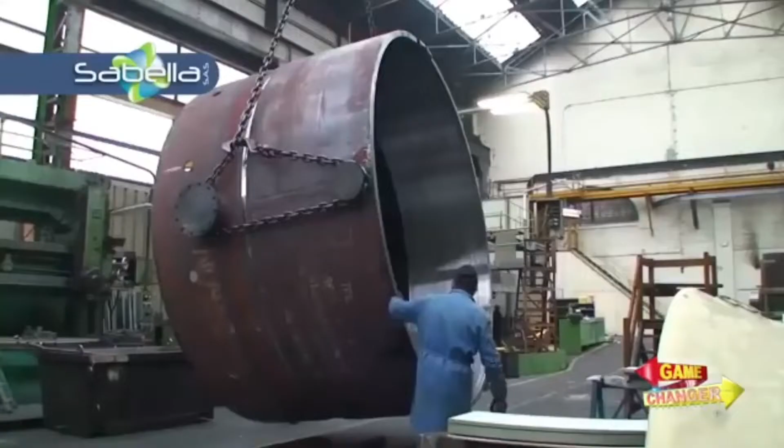We can harness energy from the oceans, and there are a lot of ways to do it - via wave, via ocean thermal energy, or what we have now, which is called tidal in-stream energy conversion, or TISEC. Thanks to the collaboration of two companies, the first ever tidal power plant in the country would soon reach our shores.

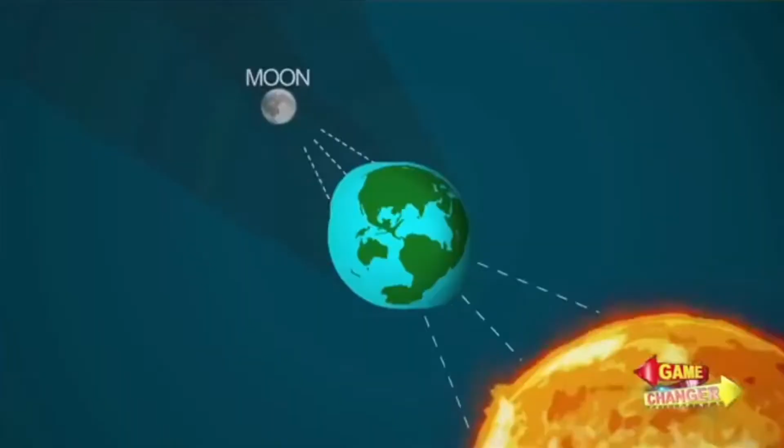So what makes tidal power reliable? One word: predictability. The movement of the sun and the moon do not deviate, so you can predict exactly how your tides will flow and how strong they will be flowing tomorrow to the next 18 years. And that's the huge advantage over any other renewable energy source.

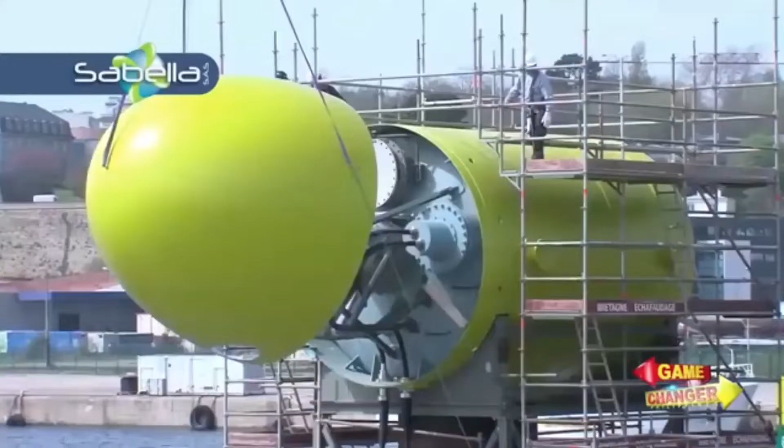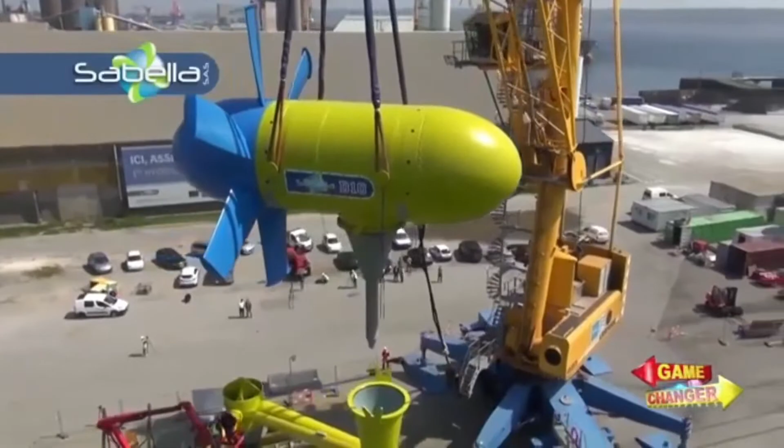In terms of technology, tidal energy traditionally lags behind solar power and wind energy generation. But the tide may now be turning in its favor. With recent developments in the field, sites with lower than optimum tide flow velocities can now be used to create electricity, significantly increasing potential sites.

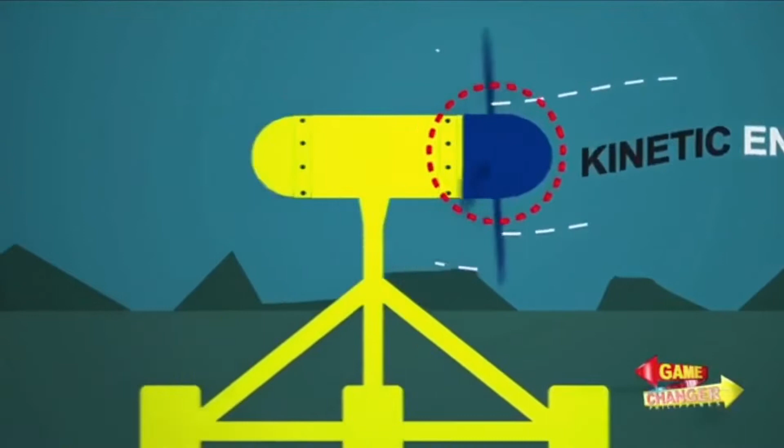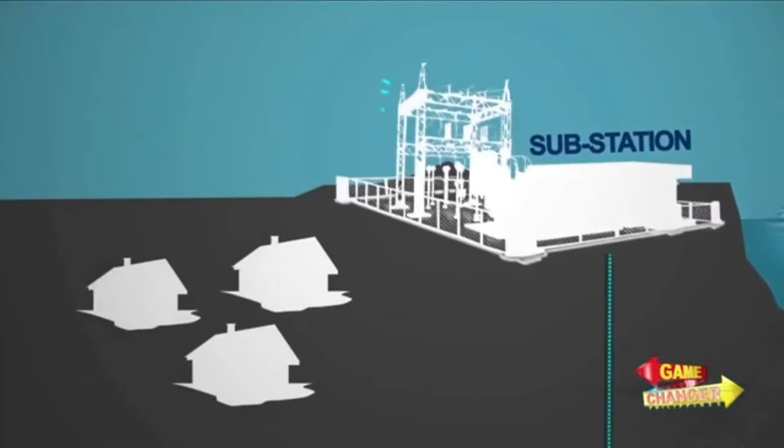The kinetic energy of tidal streams is transformed into mechanical energy by the turbines. A generator inside each turbine would then transform the mechanical energy into electrical energy. The electricity produced would course through a submarine cable to substations on land and eventually be distributed to consumers. In the proposed plant, each turbine is 15 meters long.

The beneficiaries would be communities in the island of Capul, northern Samar. Capul is short for Acapulco, commemorating its importance in the Manila-Acapulco galleon trade of the 1600s. Today, Capul relies solely on diesel generators to provide electricity to 60% of the island's power needs for only 8 hours a day.

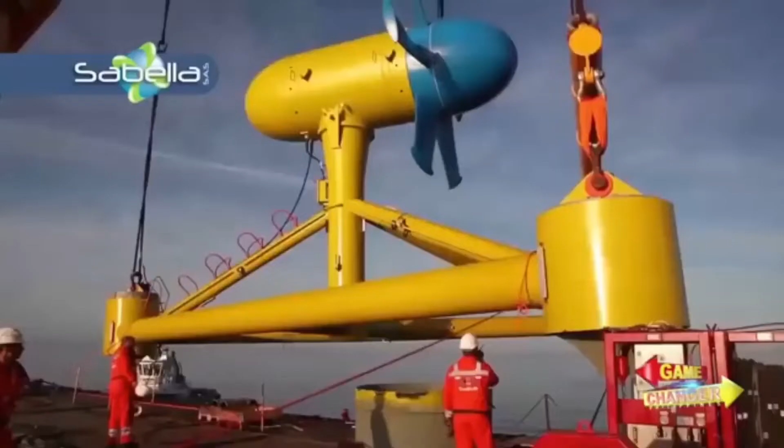So now we know what resource we have there, and we got Sabella on board. Sabella comes in with its extensive technical expertise, and we will be deciding what kind of turbine and where exactly we will be placing it in San Bernardino.

The San Bernardino Strait is the gap that separates the Bicol landmass and the island of Samar. And if there's one place in the eastern part of the country where the tidal flow is greatest, it would be here. Unfortunately, it is also where all manner of marine life enters our waters from the Pacific Ocean, including the biggest fish in the world, the whale shark or the butanding.

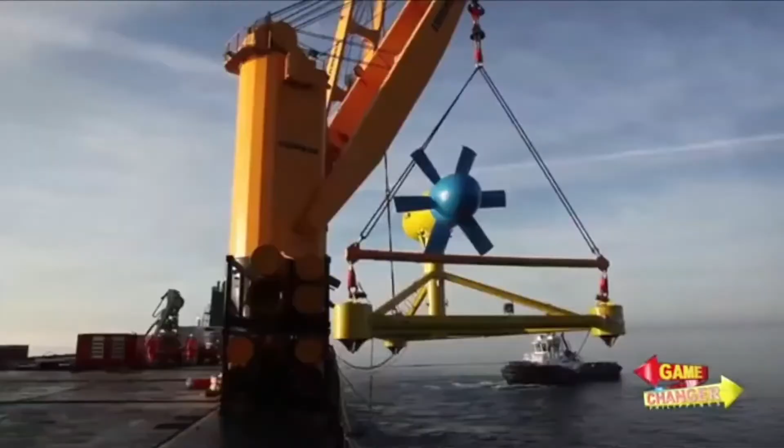The tidal power plant will be built with the latest high-technology center, which would accurately monitor relevant data from the turbines.

So, can you imagine if we can tap these resources? And considering the Philippines is an archipelago, surrounded by water, definitely the development and deployment of ocean energy technologies will be a game changer, not only today, but definitely in the future.

Power plant analysis of tidal energy. So let's talk about tidal energy.

What is tidal energy? Tidal energy is a form of power produced by the natural rise and fall of tides caused by the gravitational interaction between Earth, the Sun, and the Moon.

Tidal currents with sufficient energy for harvesting occur when water passes through a constriction, causing the water to move faster. Using specially engineered generators in suitable locations, tidal energy can be converted into useful forms of power, including electricity. Other forms of energy can also be generated from the ocean, including waves, persistent ocean currents, and the differences in temperature and salinity in seawater.

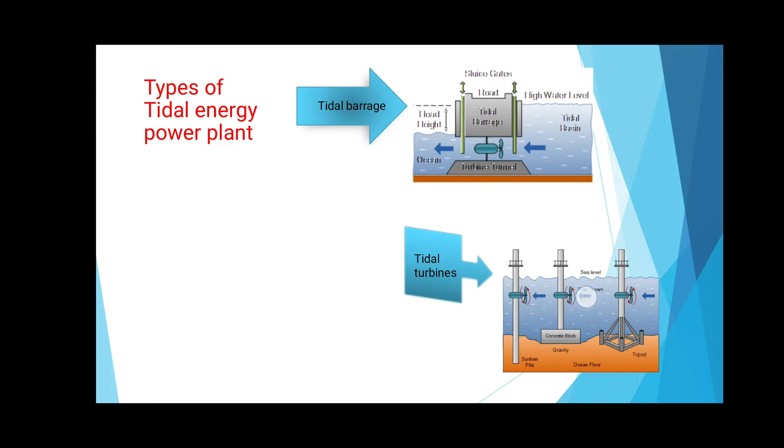The third one is tidal fences. A tidal fence is a type of tidal power system that has vertical axis turbines mounted in a fence or row placed on the seabed. Similar to tidal turbines, water passes through the turbines and generates electricity.

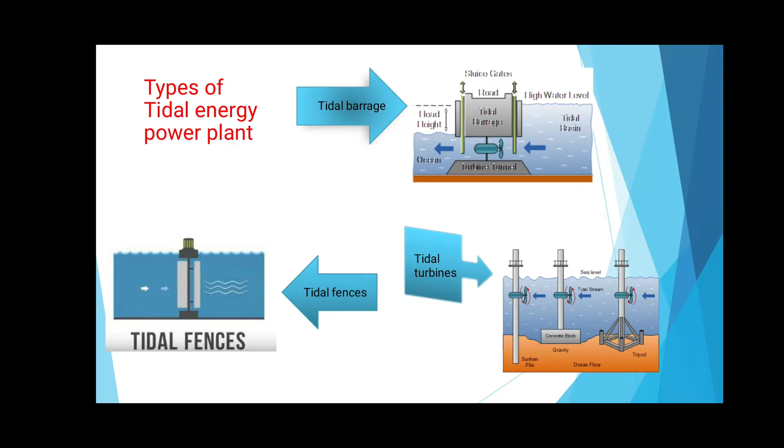Advantages and disadvantages of tidal energy power plants. Advantages: it is a renewable source of energy. Tidal energy is environmentally friendly and doesn't produce greenhouse gases. Because 71% of Earth's surface is covered by water, it is possible to generate this energy on a large scale. Efficiency of tidal power is far greater compared to coal, solar, or wind energy. Its efficiency is around 80%.

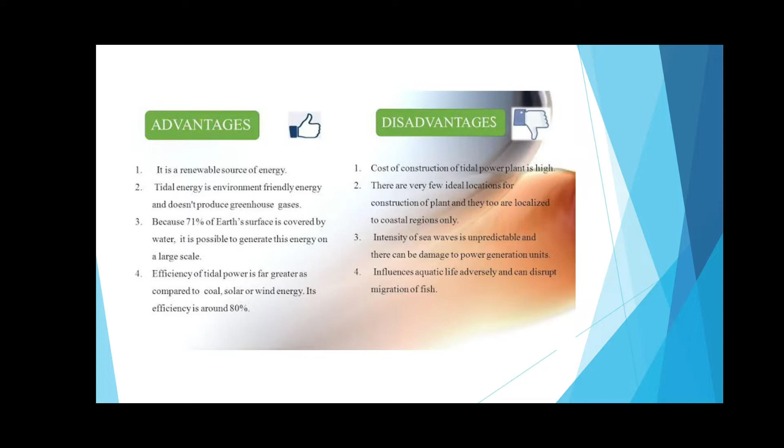Disadvantages: cost of construction of tidal power is high. There are very few ideal locations for construction of plants, and they too are localized to coastal regions only. Intensity of sea waves is unpredictable and they can cause damage to power generation units. They influence aquatic life adversely and can disrupt migration of fish.

The world's biggest tidal power plants are located at Sihwa Lake Tidal Power Station, South Korea; La Rance Tidal Power Plant in France; Swansea Bay Tidal Lagoon, United Kingdom; MeyGen Tidal Energy Project, Scotland; and lastly Annapolis Royal Generation Station in Canada. To know more about tidal energy, let us watch and learn in this video.

Tidal power is a form of hydropower that converts the energy from the natural rise and fall of the tides into electricity. Tides are caused by the combined effects of gravitational forces exerted by the moon, the sun, and the rotation of the earth.

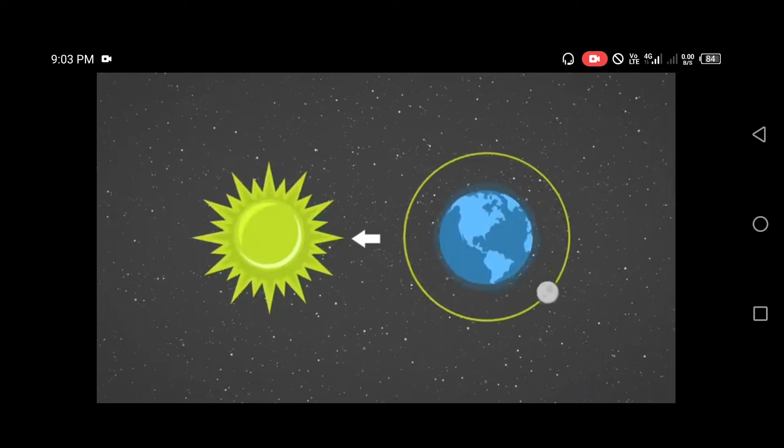Tidal plants can only be installed along coastlines. Coastlines often experience two high tides and two low tides on a daily basis. The difference in water levels must be at least 5 meters high to produce electricity. Tidal electricity can be created from several technologies, the main ones being tidal barrages, tidal fences, and tidal turbines.

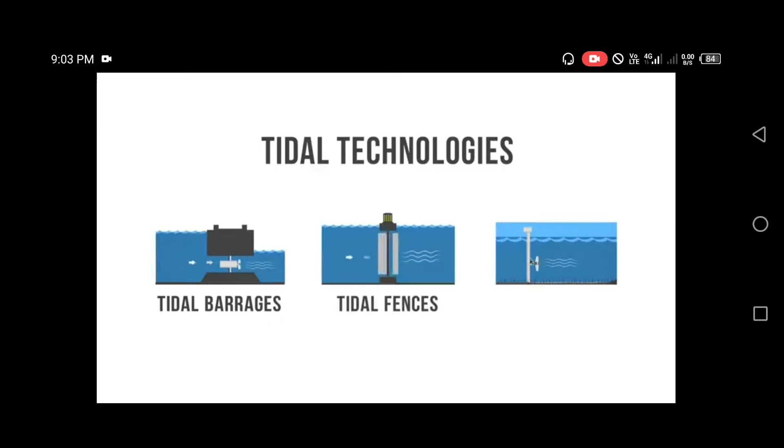Tidal barrages are the most efficient tidal energy sources. A tidal barrage is a dam that utilizes the potential energy generated by the change in height between high and low tides. This energy turns a turbine or compresses air, which in turn creates electricity.

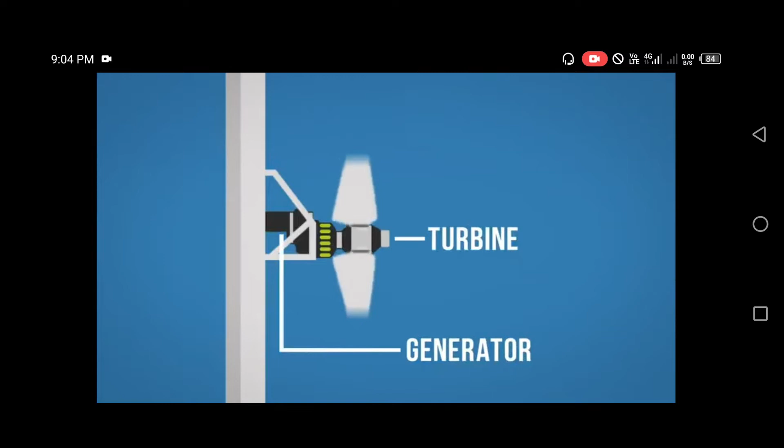Tidal fences are turbines that operate like giant turnstiles, whereas tidal turbines are similar to wind turbines, only underwater. In both cases, electricity is generated when the mechanical energy of tidal currents turns turbines connected to a generator, which produces electricity. Ocean currents generate relatively more energy than air currents because ocean water is 832 times denser than air and therefore applies greater force on the turbines.

Tidal power is easy to install and renewable, having no direct greenhouse gas emissions and a low environmental impact. Because the ocean's tidal patterns are well understood, tidal energy is a very predictable energy source, making it highly attractive for electrical grid management. This sets it apart from other renewables that can be more unpredictable.

However, adoption of tidal technologies has been slow, and so far the amount of power generated using tidal power plants is very small. This is due largely to the very specific site requirements necessary to produce tidal electricity. Additionally, tide cycles do not always match the daily consumption patterns of electricity and therefore do not provide sufficient capacity to satisfy demand. That's tidal power.

Tidal energy's global environmental impact. A tidal power scheme is a long-term source of electricity. A proposal for the Severn Barrage, if built, has been projected to save 18 million tons of coal per year of operation. This decreases the output of greenhouse gases into the atmosphere.

Fossil fuel resources are likely to decline during the 21st century, as predicted by Hubbert peak theory. Tidal power is one of the alternative sources of energy that will need to be developed to satisfy human demand for energy.

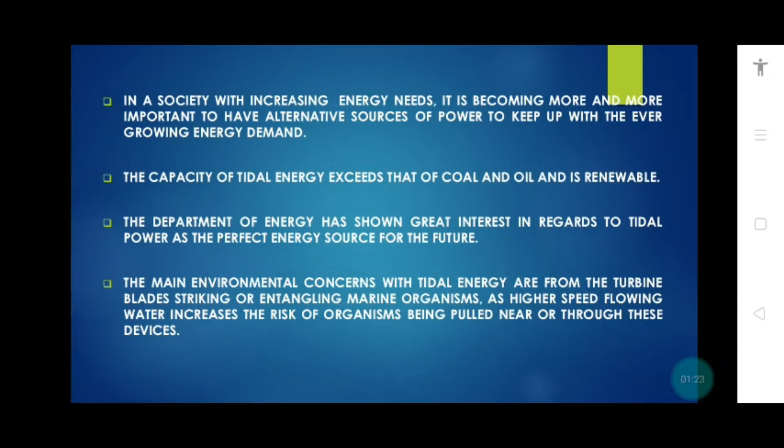The main environmental concerns with tidal energy are from the turbine blades striking or entangling marine organisms, as higher speed flowing water increases the risk of organisms being pulled near or through these devices.

Health and safety considerations: as far as tidal power is concerned, air chambers on the turbines will need to be built on the shore, which cannot only interfere with the habitat of local wildlife, but can be visually intrusive for local residents and visitors to the area.

The social and ethical considerations: in order for a power plant to be built, the potential installation site must meet very specific requirements. First, they need to be located on a coastline, which limits potential station sites to coastal states. The tidal power stations need to be built in places where the difference in height between high and low tide is significant enough to power turbines.

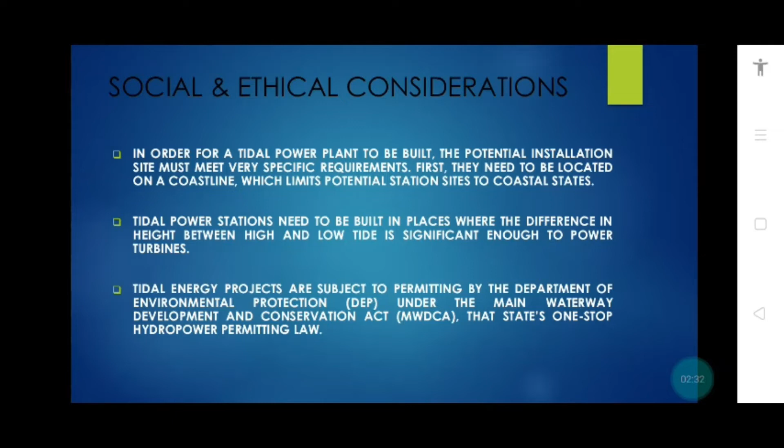Tidal energy projects are subject to permitting by the Department of Environmental Protection under the Maine Waterway Development and Conservation Act, that state's one-stop hydropower permitting law.

Hello, now we are going to solve some sample problems related to tidal wave energy using a tidal power plant.

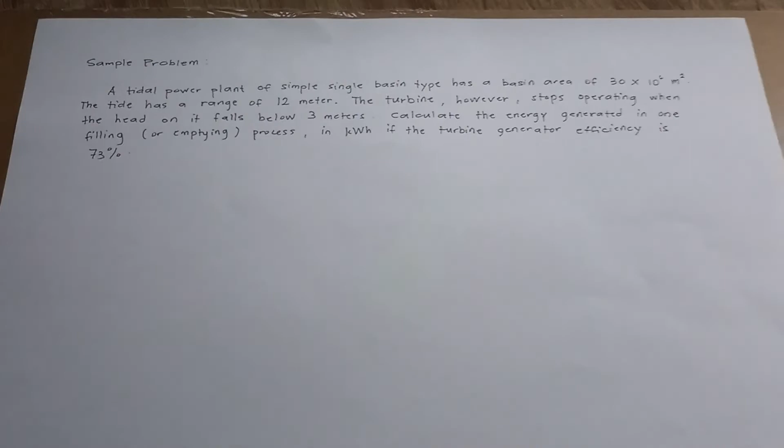Here's the problem. A tidal power plant of simple single basin type has a basin area of 30 million square meters. The tide has a range of 12 meters. The turbine, however, stops operating when the head on it falls below 3 meters. Calculate the energy generated in one filling or emptying process in kilowatt-hours if the turbine generator efficiency is 73%.

Okay, so to better understand the situation, I will provide a drawing.

Here's the drawing. The tidal power plant is a simple single basin type, so single basin, and it has a basin area of 30 million square meters. So the area here, taas and lapad, is equivalent to 5,000 football fields. That's how big it is. And then the tide has a range of 12 meters.

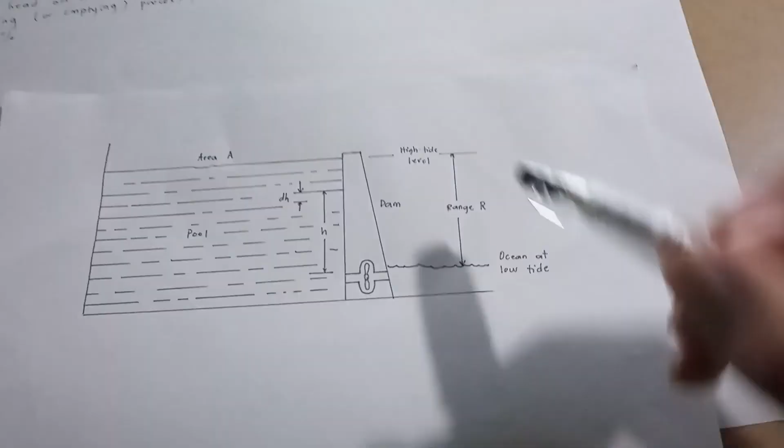So this is R. From the low tide, from its lowest height, to the highest tide, 12 meters is its height.

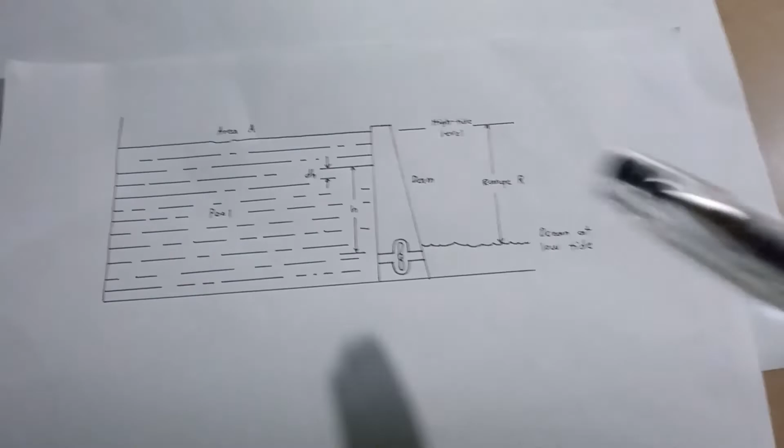Then the turbine, however, stops operating when the head on it falls below 3 meters. So once it reaches below 3 meters, the turbine no longer turns because of less force. So calculate the energy generated in one filling or emptying process in kilowatt-hour if the turbine generator efficiency is 73%.

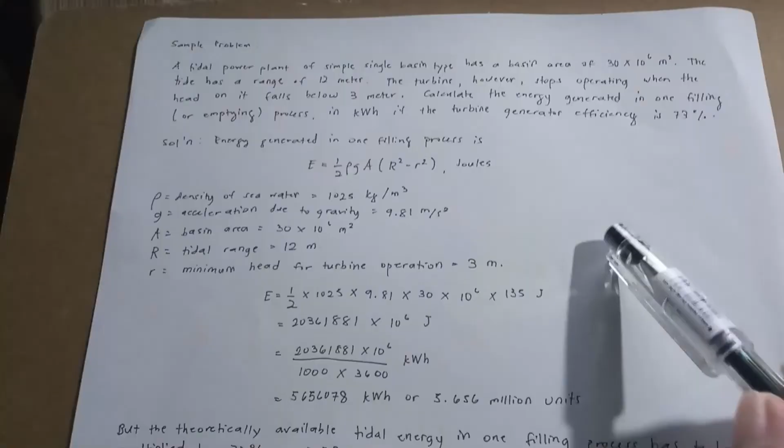Okay, so here is our solution. The energy generated in one filling process is equal to this equation. E, which stands for the energy generated, is equal to 1/2 times ρ, which stands for the density of seawater, equivalent to 1,025 kilogram per cubic meter, times G, the gravitational acceleration, which we know is 9.81 meters per second squared.

Times the area, the basin area, which is equivalent to 30 million square meters, times the difference between the square of the range and the square of the minimum head for turbine operation. The tidal range is 12 meters as mentioned in the question, and the minimum head for turbine operation is 3 meters. So in this problem, we are going to find the energy generated in one filling or emptying process in kilowatt-hour with the efficiency of the turbine, which is 73%.

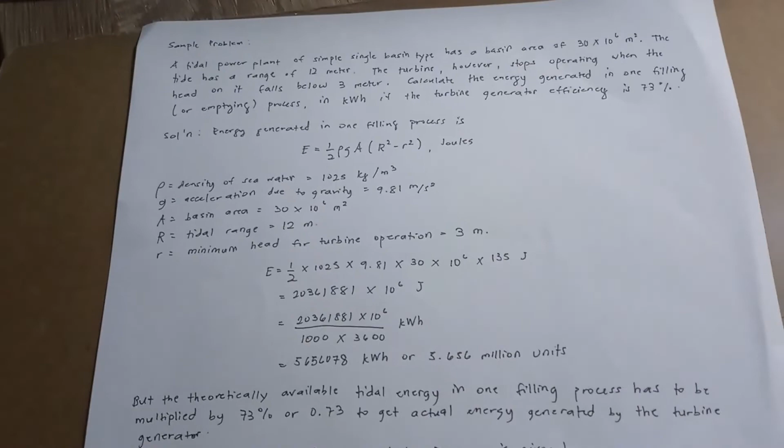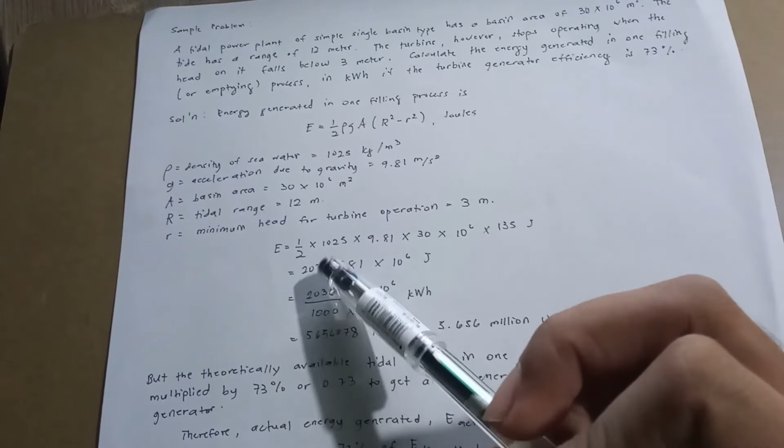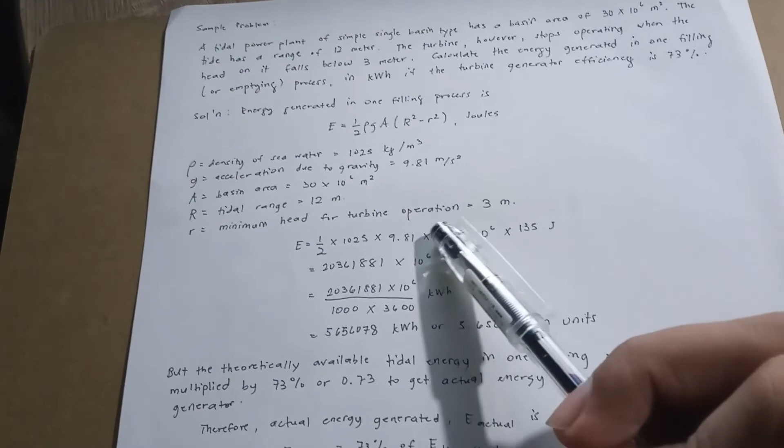So let's proceed to plugging in the values. 1/2 times the density, which is equal to 1,025, times 9.81 the gravitational acceleration, times 30 times 10 raised to the power 6, or 30 million square meter area of the basin, times 135.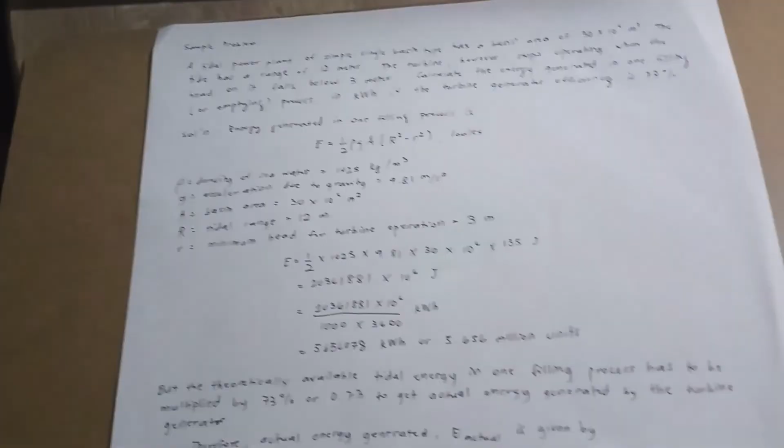So how do we come up with 135? Just plug in the value of R, which is 12 squared, minus r, which is 3 squared. So 12 squared minus 3 squared is equal to 135.

You can do it on your own calculator to verify. And then after calculation, we will come up with the result of 20,361,881 times 10 raised to the power 6 joules. So that's the unit of the energy.

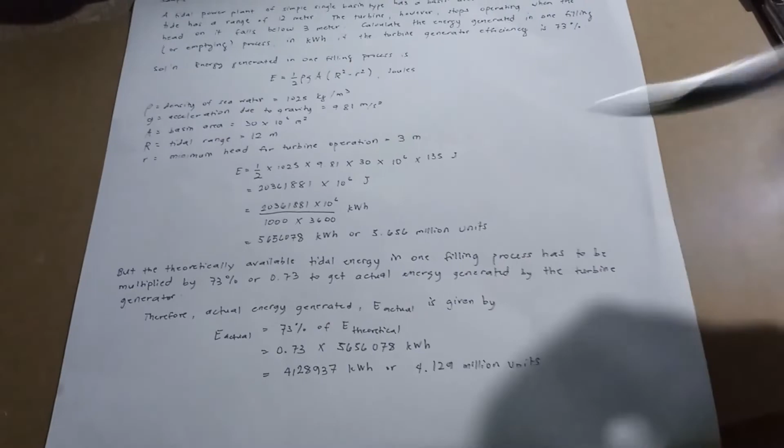And then, to convert the unit of joules to kilowatt-hour, we are going to multiply it by its equivalent value. So 1 kilowatt-hour is equal to 1,000 times 3,600 joules.

So if we divide the value of 1,000 times 3,600 into the result of our energy calculation, this is what happens. We put it at the bottom so we can cancel out the joules and what remains is the kilowatt-hour. So if you calculate it on your calculator, this value is 20,361,881 times 10 raised to the power 6, over 1,000 times 3,600.

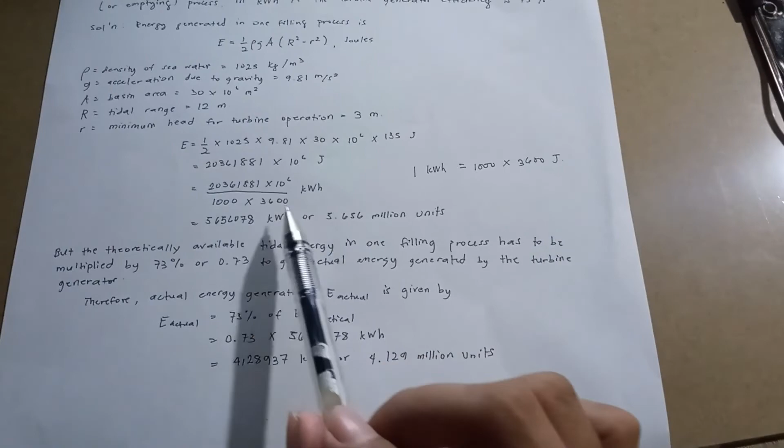So the result will be 5,656,078 kilowatt-hour, or 5.656 million units. So that's our result.

But it doesn't end there. We are going to consider the turbine generator efficiency. So the theoretical available tidal energy in one filling process has to be multiplied by 73%, or 0.73, to get the actual energy generated by the turbine generator.

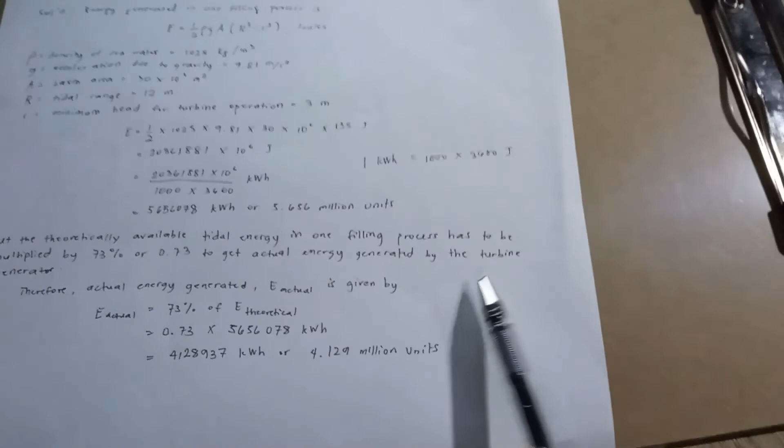Therefore, the actual energy generated, or E actual, is given by multiplying the efficiency times the value of our theoretical energy. So 0.73 times 5,656,078 kilowatt-hour.

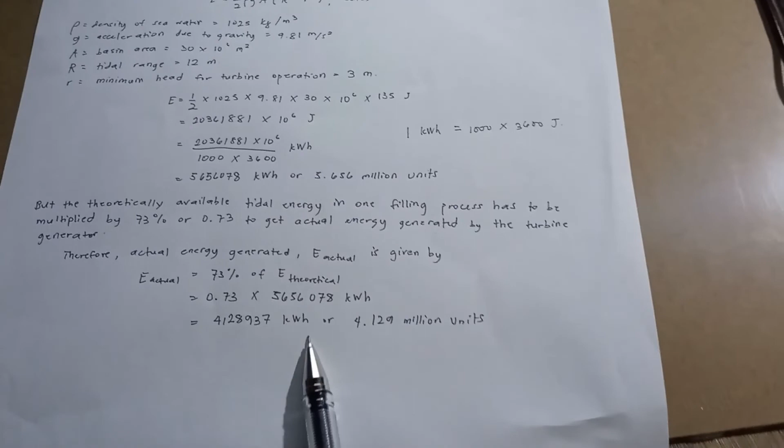And it will result in 4,128,937 kilowatt-hour, or 4.129 million units. Okay, so that is the energy generated in one filling or emptying process of our tidal power plant with a simple single basin type with an area of 30 million square meters.

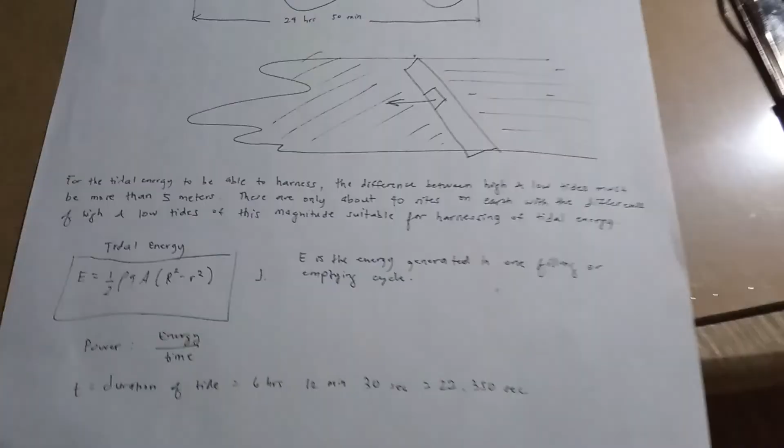Okay, so before we end, please note this: for tidal energy to be able to be harnessed, the difference between high and low tide must be more than 5 meters. With less than 5 meters difference between high and low tide, it cannot be harnessed — it has very little chance of harnessing tidal energy.

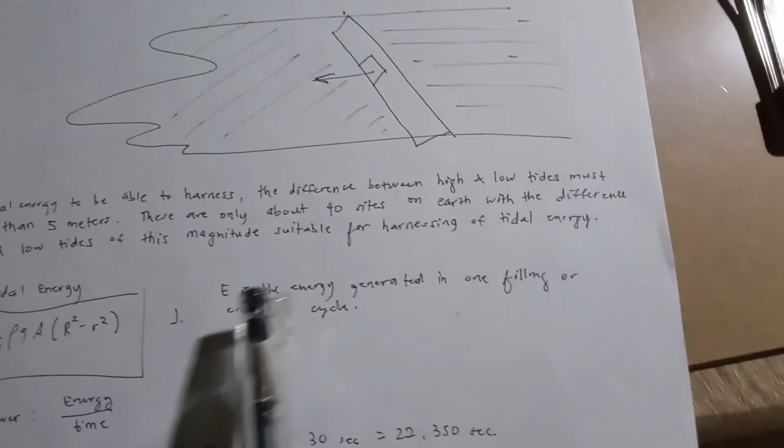So there are only about 40 sites on Earth with a difference of high and low tide of this magnitude suitable for harnessing tidal energy. Only about 40 sites in the world can harness tidal energy because of the requirement that the high tide and low tide difference be more than 5 meters.

So that's all, and that ends my presentation.